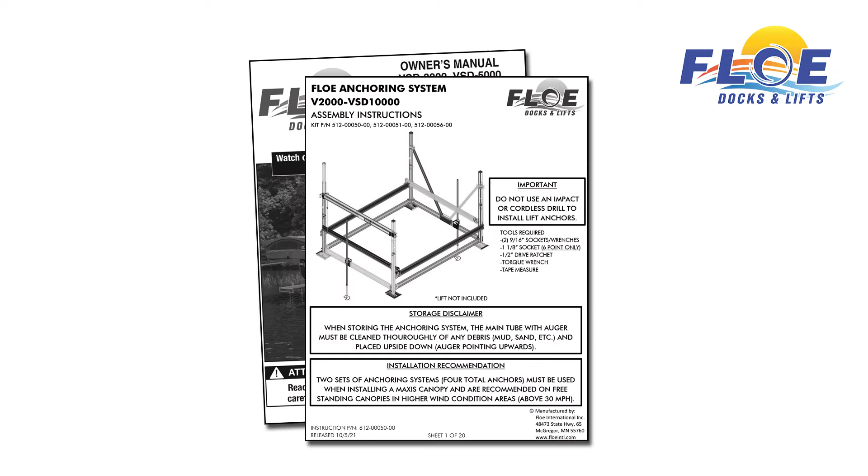This video will complement other detailed information provided in Floe's written assembly instructions and owner's manual. Each boat lift anchoring system will take approximately 5 minutes to assemble and install, with one person. In order to do this assembly, you will need the following tools.

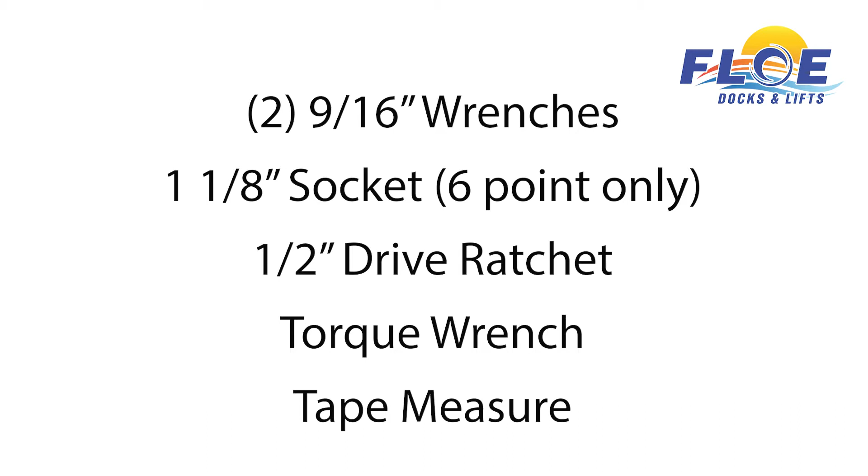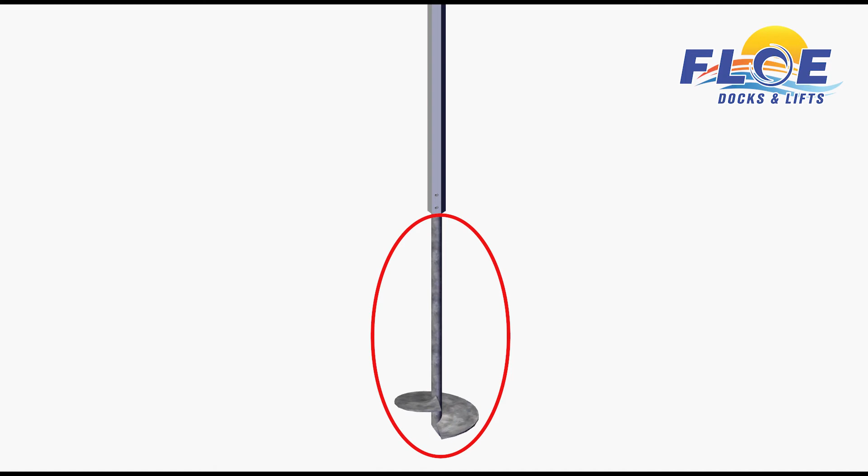There are a few important notes before you begin the anchoring system assembly and installation. Do not use an impact or cordless drill to install the anchors, or damage and injury may result. Also, when storing your anchoring system, the main tube with the auger must be cleaned thoroughly of any debris, and placed upside down, with the auger pointing upward. And last, ensure the lift is fully installed and leveled in the correct location before installing anchors.

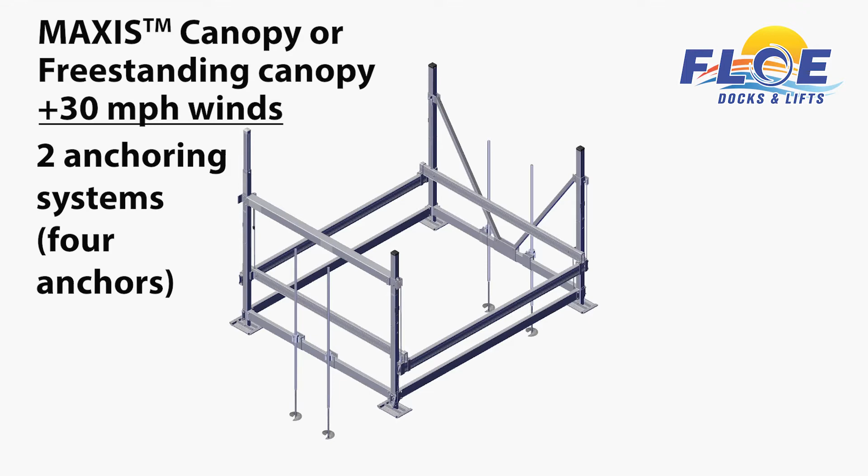Only one anchoring system, which is a total of 2 anchors, is suggested for most Floe boat lifts. However, 2 anchoring systems, for a total of 4 anchors, must be used when installing a MAXIS canopy, and are recommended on freestanding canopies for areas that have wind conditions higher than 30 miles per hour. Consult with your dealer if you need clarification on how many anchors you need for your lift.

Are you installing anchors on a freestanding canopy in a high wind area? Does your lift have a MAXIS canopy? If your answer is yes to either of these questions, skip to the next chapter. This chapter is for anchoring all other Floe boat lifts. Before you begin installation, it's important to know the primary direction of the wind where your lift is located so you can install anchors in the correct locations.

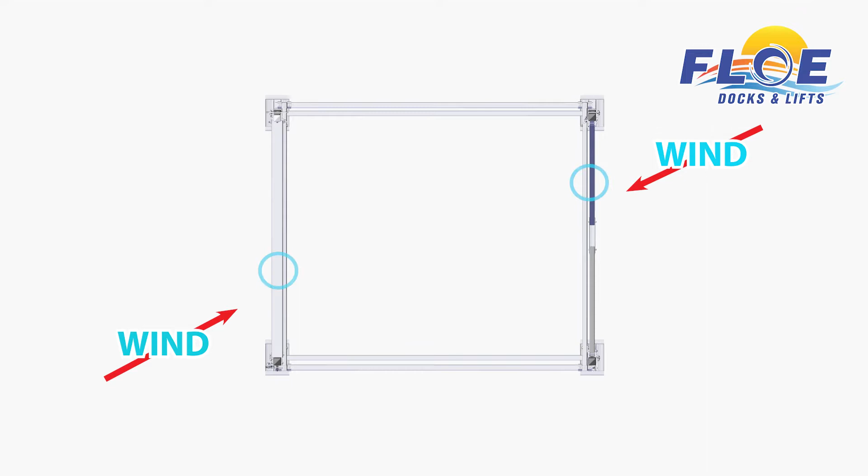If wind predominantly comes from either of these 2 angles, install the anchors in these 2 off-center areas. If wind predominantly comes from one of the 2 other angles, install the anchors in these 2 other off-center areas. If wind never blows from an angle but consistently and only blows perpendicular to the lift, either installation variation is acceptable. No matter what direction the wind comes from, be sure that the anchors are not installed parallel to each other, but are instead installed kitty corner, as shown.

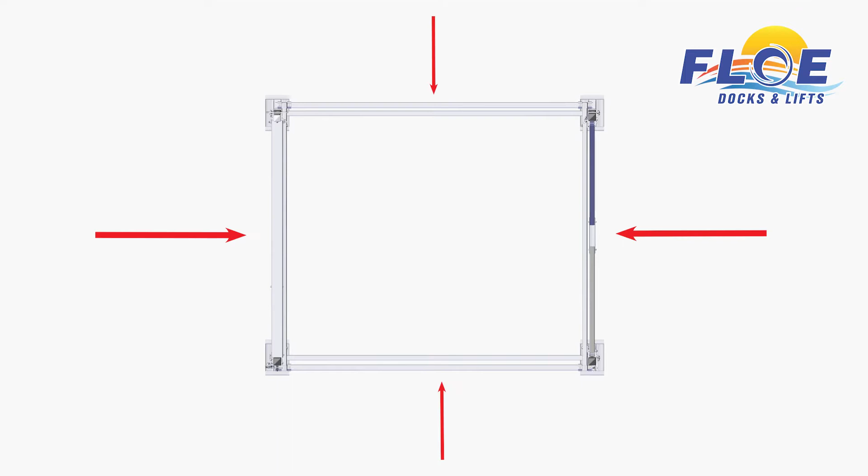Anchors are placed in these off-center locations for the following reason. Wind blowing perpendicular to the lift in either variation will drive anchor placement toward the center of the lift. Wind blowing at an angle to the lift will drive anchor placement toward the corner posts. By using off-center placement, the stability of your lift is greatly increased, and will be anchored properly no matter if wind is coming from an angle or perpendicular.

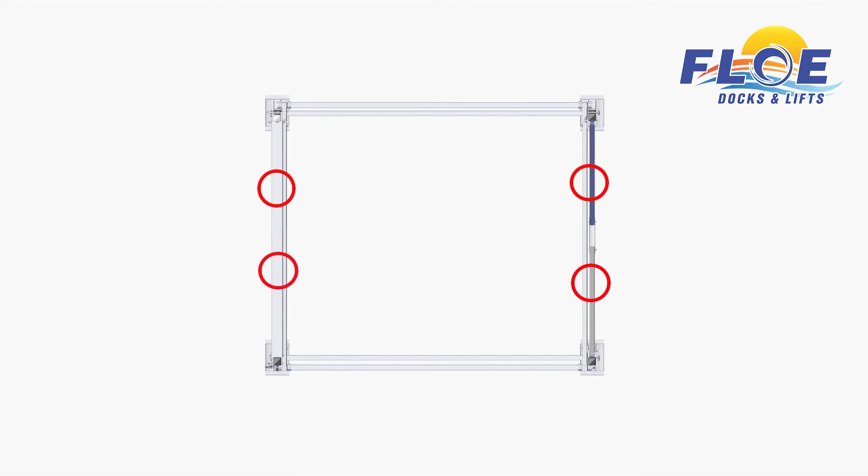If your lift has a MAXIS canopy, or you are placing anchors on a freestanding canopy where winds exceed 30 miles per hour, install 2 sets of anchors in the following locations. In general, for all boat lift sizes, if you live in an area where winds exceed 30 miles per hour at any given time, such as during storms, you should install 2 sets of anchors to be safe. Consult with your dealer if you need clarification on how many anchors you need for your lift.

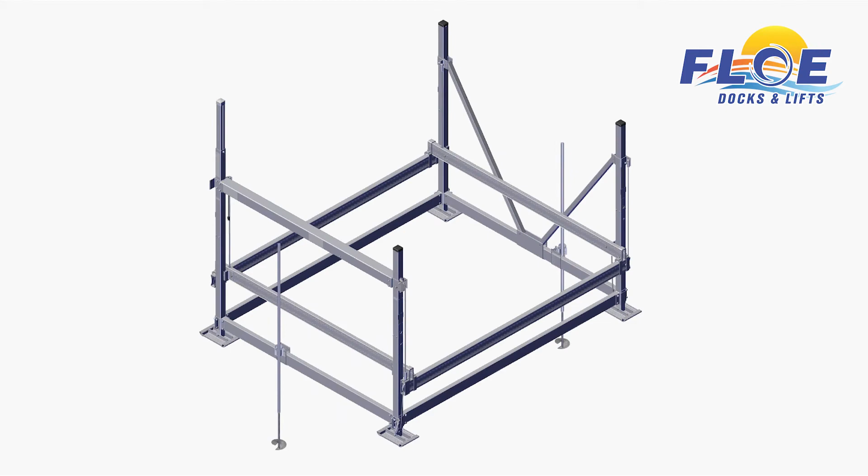For this animated assembly, we'll show how to install 2 anchors. If you are installing 4 anchors, the assembly and installation of individual anchors is the same. Before assembling the clamps for the anchors, be sure that they are installed at least 7 inches away from the corner post. This will allow clearance between the sand pad on the boat lift and the auger on the anchor.

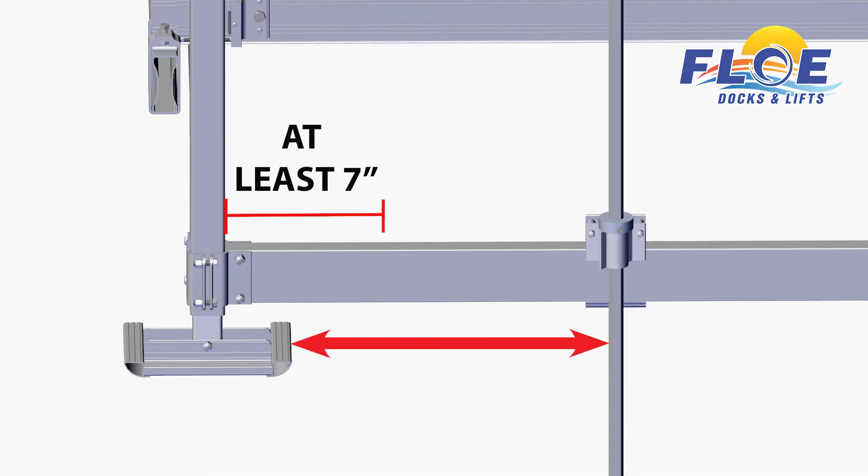Locate the 2 halves of the clamp. One half has an incorporated female channel, and the other half has a male channel. Place the female half of the clamp onto the side frame beam as shown. Slide the male half into the female half, as shown. Ensure that the 2 halves are joined firmly together and will not separate easily.

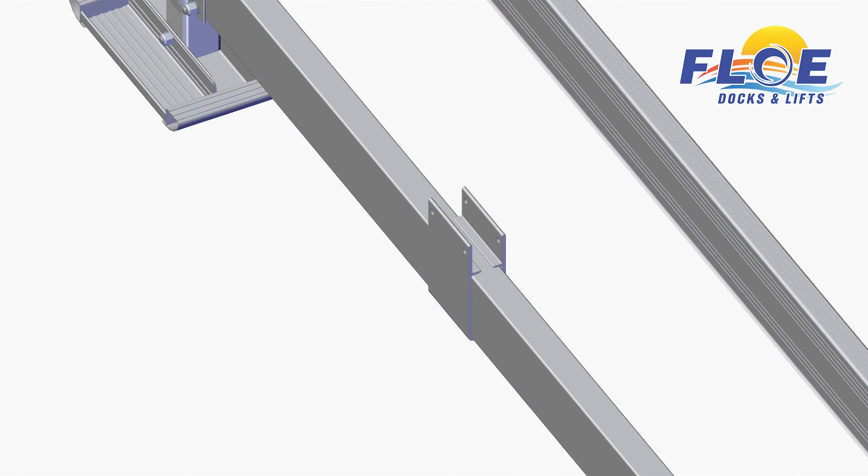Locate the anchor guide pocket and spacer tubes, and align them with the milled holes in the clamp, as shown. Insert the 3.5-inch bolts into the holes, and secure with the included nylock nuts, as shown. Larger lifts will use 3 3/4-inch bolts. Tighten and torque to 35 foot-pounds.

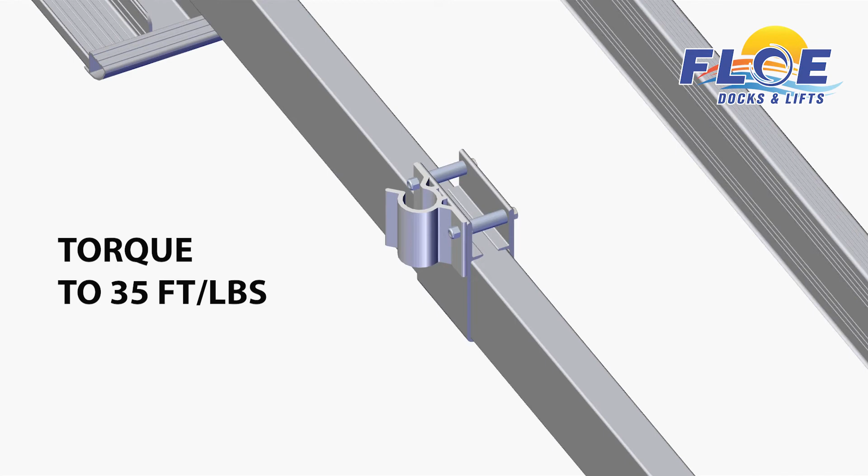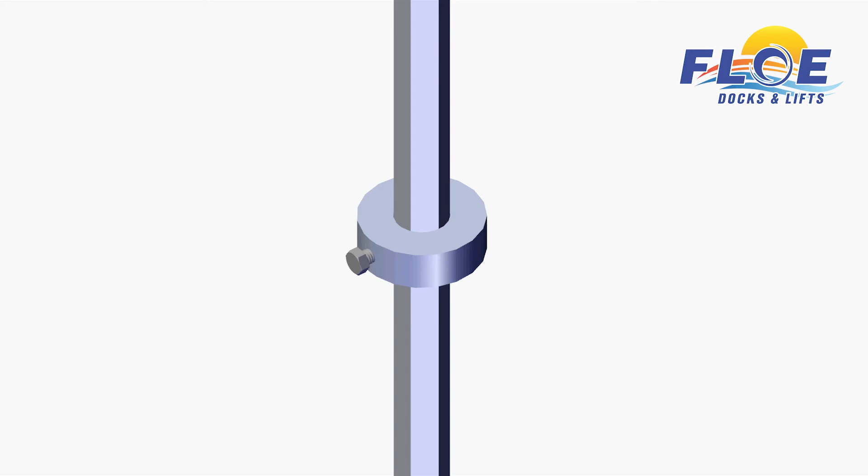Locate the auger assembly. Slide the stop collar over the anchor tube, and insert the bolt. Tighten just enough to hold it in place. It will be tightened and torqued later. The stop collar will be the guide for how deep the auger will need to be driven into your lake bed. The placement of the stop collar is found by following the instructions on pages 13 through 17 in your assembly guide. Once you determine the correct placement, tighten and torque the set bolt to 20 foot-pounds.

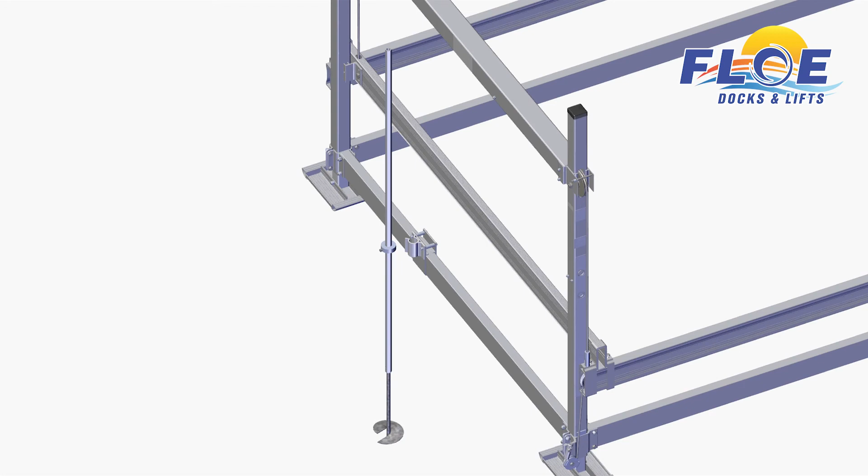To insert the auger assembly into the pocket, bring the auger assembly toward the lift until it touches the frame beam. The pocket is purposefully designed so the hex shaft portion of the assembly will not slide into the pocket. In this way, the auger assembly will not accidentally slide out of the pocket after installation. Only the auger shaft will slide into the pocket, so the auger assembly needs to be raised until the auger shaft slides into the pocket, as shown.

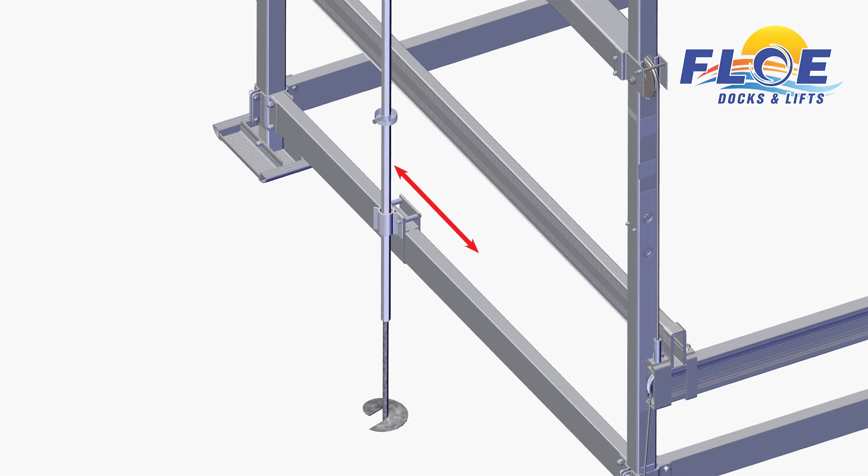Next, slowly lower the assembly into the pocket until the auger touches the lake bed. If there are obstructions on the lake bed, the bolts on the clamp assembly will have to be loosened, and the entire anchoring system will have to be slid one way or the other in order to find a suitable lake bottom without obstructions. Once the location is finalized, retighten and retorque the bolts on the clamp to 35 foot-pounds.

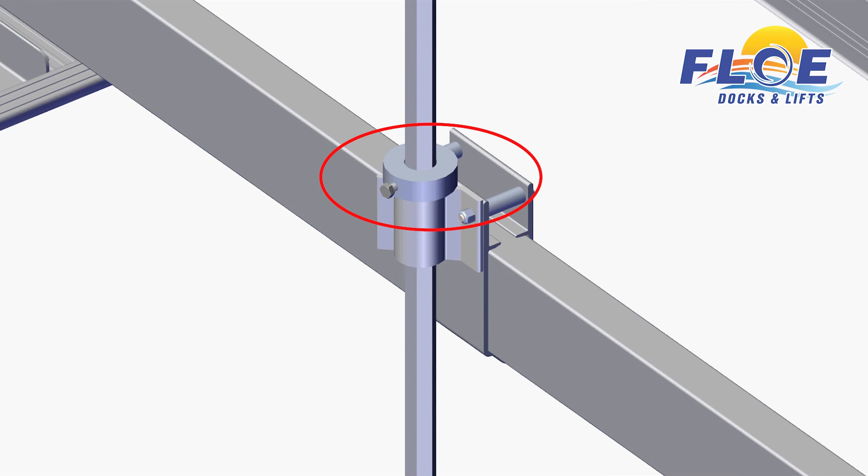Lastly, drive the anchor assembly into the lake bed using a 1 1/8 inch 6-point socket and a 1/2 inch ratchet until the stop collar reaches the top of the anchor pocket, as shown. Do not use a 12-point socket, as damage may occur to the hex shaft. Also, do not use an impact or cordless drill to drive the anchor, or damage and injury could result. Repeat on other side.